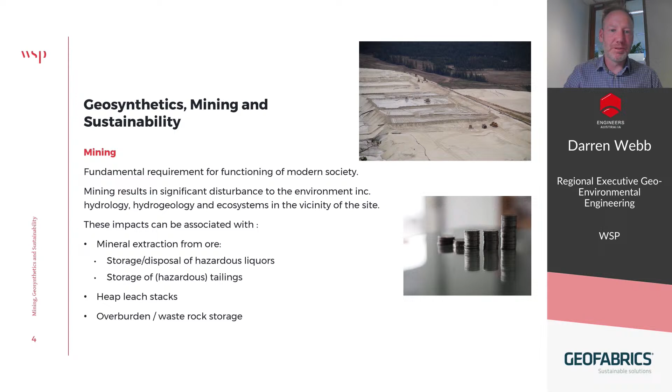So mining and ESG. To maintain a social licence, miners must manage impacts from mining in a manner which meets societal expectations. And that comes from different angles, but particularly ones that you're regularly dealing with the regulator, from financiers and shareholders, and particularly some of the large pension funds are quite active in this regard. And as I'm sure most are aware, there's increasing focus on ESG and sustainability in recent years, and that's particularly in the context of the mining industry, driven in part by some past industry behaviours which perhaps have not quite met society's expectations.

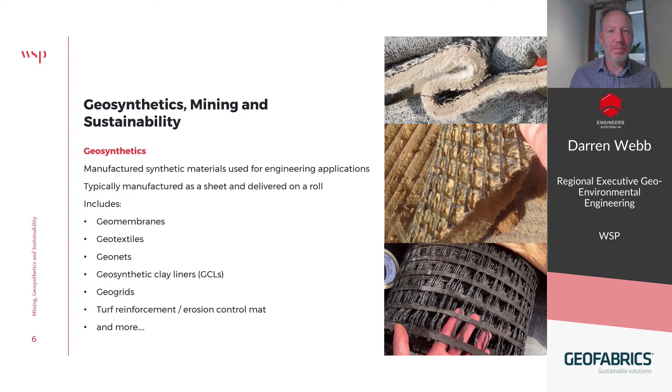And the types of geosynthetics you most commonly will be dealing with are geomembranes, geotextiles, geonets, GCLs or geosynthetic clay liners, geogrids, and then there's erosion control mat, turf reinforcement, and many more. I understand Ryan's going to provide a bit more of an overview of the different products, so I won't expand any further in this presentation. But I guess the message is there are lots of different types of geosynthetic materials, and it's not just geomembranes and geotextiles, which are perhaps the most commonly known or the most commonly used.

So, mitigation of mining impacts in geosynthetics. To mitigate impacts to the environment from mining activities, it typically requires engineering measures to be developed. And geosynthetics can obviously play a role in that.

And this includes applications such as lining systems for solid and liquid - solid often refers to tailings. It's worth noting that lining systems for tailings help reduce seepage, but can increase the liquefaction risk, and that has an impact on embankment design. The embankment needs to be appropriately designed with or without a liner.

It does change things, or it can change that risk profile. Capping systems, so at the closure stage particularly, closing of tailings facilities, waste dumps, etc. Drainage and filters, ground improvement, stormwater management, and of course many more.

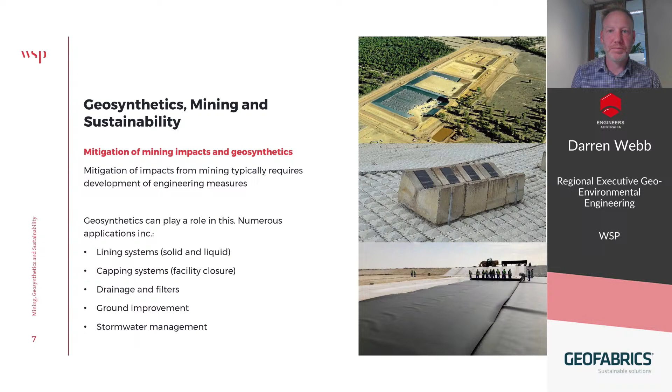So geosynthetics and sustainability. The use of geosynthetics enables construction of liner systems with much lower permeability than naturally occurring materials, which typically means clay, and probably more importantly, in areas where clay is not available. So it helps enable these type of activities to occur relatively sustainably in areas where that may not have been able to be done otherwise.

Due to their thin and engineered nature, they can offer benefits over conventional construction materials, which are typically quarried clay, stone, sand, etc. Those benefits are that it's easier to transport, you ultimately need less material because of the engineered nature of geosynthetics, and associated with that, reduced resource usage and reduced disturbance to the environment - less need to open up borrow areas, import material from quarries, etc. And as a result of all of that, reduced greenhouse gas emissions.

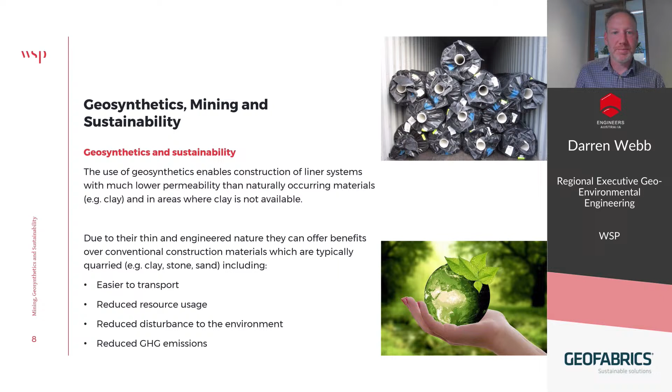So designing with geosynthetics. Similar to any other engineering material, the design must be undertaken with appropriate rigour. In the case of geosynthetics, that means particular focus on durability - chemical, which is typically linked to the exposure conditions, what are the geosynthetics required to contain, and UV and temperature. Obviously, higher temperature applications are more challenging.

And forces during construction and service. This is obviously an easily damaged thin material, and it's got low interface strengths - so in simple terms, it can be a slippery material. You need to design often for veneer or slope stability failure along that interface.

And then specifying the material properly - all geomembranes aren't the same, all geotextiles aren't the same. Different materials, different products have different properties, and that needs to be considered for the design. What does your design actually need?

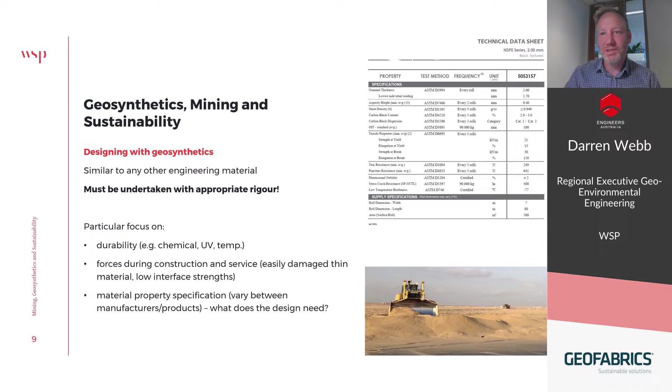Mining applications often involve challenging service conditions, often more challenging than other applications. And that includes storage or containment of very low or very high pH materials, such as those associated with heap leach activities or bauxite residue, where you're dealing with acidic and caustic materials respectively. Any other material that might have a high contaminant load - hydrocarbons, salts, metals, other chemicals - and PFAS is obviously a consideration, along with exposure to high temperature or UV.

And the reality is, usually in these type of challenging applications, you're dealing with a mix of those service conditions - high temperature, high UV, and acidic material containing other contaminants as well. So you're generally dealing with multiple challenges. As a result of that, exposure conditions are almost always site-specific and must be considered as such in design. Just because something worked on another site in a similar situation, it doesn't mean that same product will work on your site, where the ore might be different, the processing approach might be slightly different, etc.

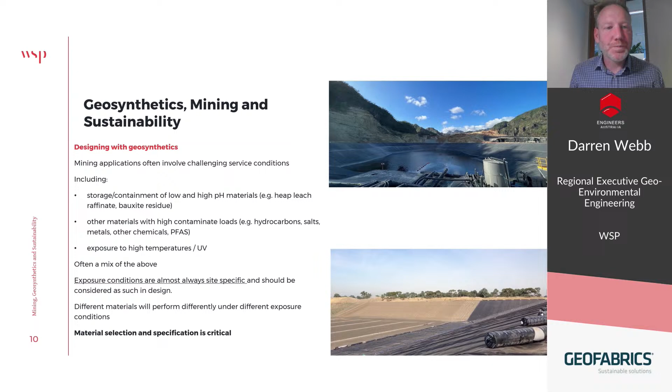So how do you help manage that? Well, there's industry guidance for geosynthetic specification, and the Geosynthetic Institute publications are the most commonly used, but they are not developed to suit challenging applications typically of what you're expecting in the mining industry, or for many other industries that you might be dealing with in geosynthetic design.

There's an excerpt from GRI GM13 there, which is the HDPE GSI specification, and you read that first sentence: 'This standard specification is intended to ensure good quality and performance of HDPE geomembranes in general applications.' What's a general application? It's open for debate, but most of the time when you're working in the mining industry, containing a hazardous material would not be categorised as a general application. So you need to be very careful about using that specification.

Relying solely on advice from a supplier is risky and generally not recommended. Suppliers should and often do know their product very well, so it's worthwhile liaising with a supplier during the design stage. But each application is different, and the supplier doesn't know the design intent. The supplier's role is ultimately to sell a product, and the designer must be aware of that. I know we're presenting with Geofabrics in this presentation, and they have a lot of very good information that can help with design, but ultimately the designer must ensure appropriate material is specified to suit the application and design life. The supplier is not taking on the risk of that material not performing as intended.

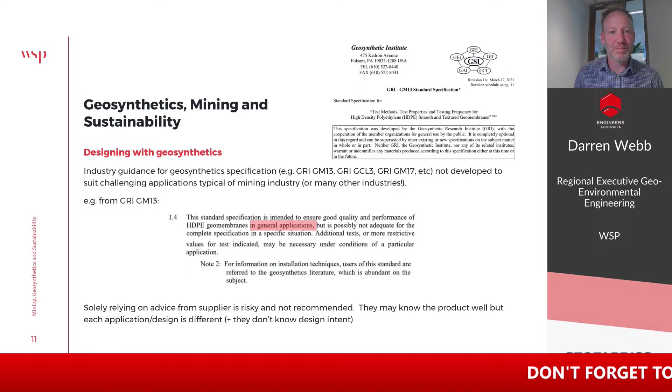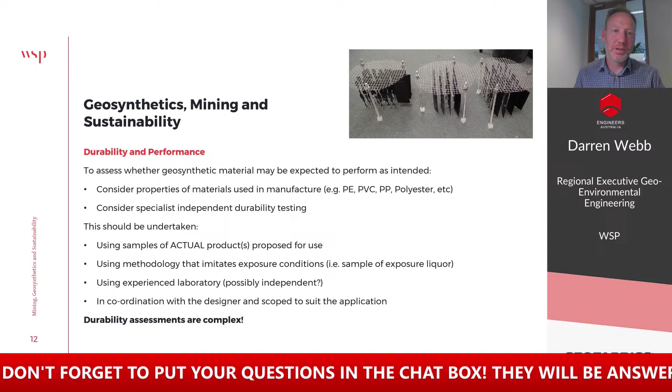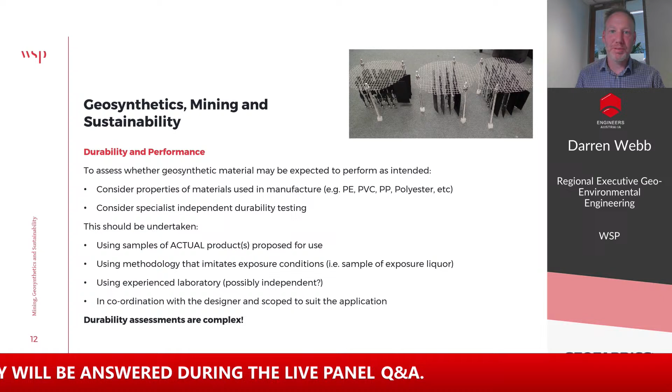So how do you do that? To assess whether a geosynthetic material may be expected to perform as intended, you can look at the properties of the material used in manufacture, so PE, PVC, polypropylene, polyester, etc. You look at, based on research and other publications, how it might be expected to perform in the exposure conditions based on what you know about them.

But most often, for these types of applications, you really need to consider doing independent durability testing. This type of testing should be undertaken using samples of the actual products proposed for use - so the actual geosynthetic product, the actual geomembrane product type that's proposed, not just a generic HDPE geomembrane, but the product that is intended for use.

Typically you might subject 3 or 4 or 5 products to the testing, so you can help identify the best product and also maintain a competitive market for the tender process.

The testing should be done using methodology that imitates the exposure condition, so using a sample of the actual exposure liquor that the material is going to be subjected to, and using an experienced laboratory that is possibly independent. If you're running a test on a suite of products from different suppliers, it's perhaps not appropriate to use the Geofabrics laboratory, because there's potentially a conflict of interest there. I'm not suggesting Geofabrics would do anything like that, but in those situations it's obviously best to use an independent laboratory to avoid that perception.

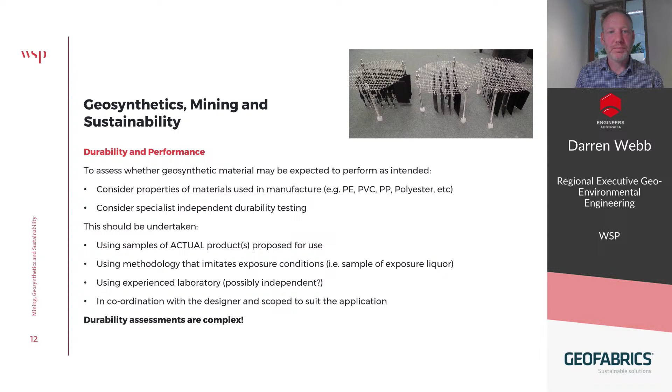So once you've gone through that process to identify the product you want to use, you need to specify it in your design, and that would include QA and QC measures in that specification. Typically there are 3 components to that QA/QC regime, including manufacturer's quality control, or MQC testing.

That's testing done by the manufacturer prior to shipping, routinely done as part of the geosynthetics industry. Every manufacturer does it, and it will be available to the designer to check.

And then independent quality control testing - this is the second step, done by the owner or designer prior to installation. That involves sampling of the material either prior to shipping or after delivery to site, prior to installation. This helps confirm the material is what the owner is paying for, and that the properties are what the design needs.

You might ask, why do you need to do that when you've got the MQC test results? You might be targeting different properties than what is covered by the MQC testing. And experience has shown that sometimes the MQC test results can have limited reliability. There have been situations where things have been picked up in the IQC stage that differ from what the MQC test results indicated, which reinforces the benefits of doing that stage of testing.

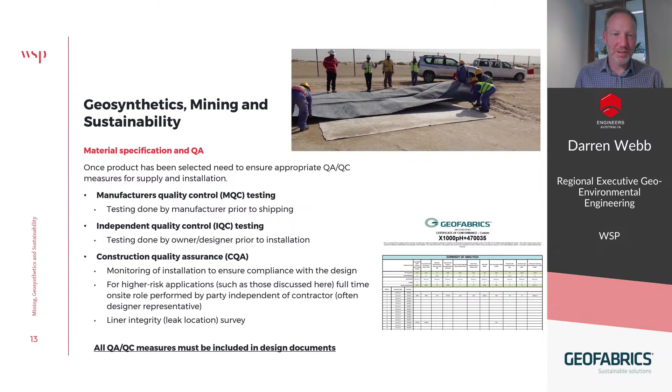But ultimately, all of those QA/QC measures must be included in the design document, prepared by the designer.

So just now, moving on to some applications from some of our recent work.

This first one involves storage of an acidic mine process liquor, approximately pH 1, so very nasty. The design was prepared by another party and included a dual HDPE geomembrane liner system, but it was a little limited as far as the specification and QA/QC measures included.

It was constructed and filled, and after the first fill it was assessed to be leaking unacceptably. The owner dewatered it, undertook a repair regime, and filled it again. Very quickly it was leaking unacceptably again, and was dewatered once more, all within one to two years of completion of construction. You can imagine there was a rather frustrated owner.

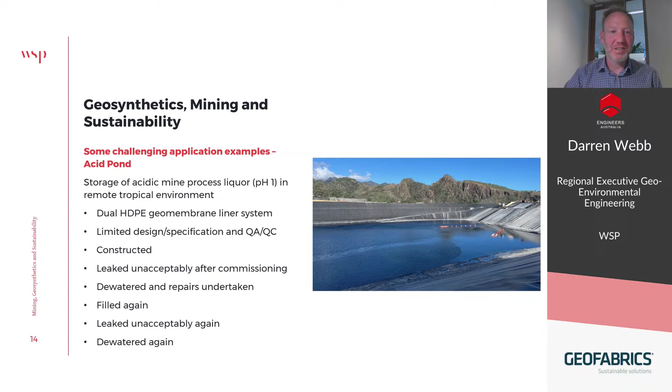So they called in WSP to have a look at the geomembrane after the pond had been dewatered for the second time. What we observed was numerous weld failures, primarily associated with extrusion welding, which we inferred to be associated with poor quality weld rod and perhaps poor workmanship from the welding—and that may be linked to limited requirements related to those two components in the design documents.

What did the design require with relation to weld rod and welding installation requirements? A series of repairs was then undertaken under the presence of a WSP engineer, in a sort of pseudo-CQA engineer role as described earlier. The pond was then filled.

No leaks have been reported, which is good news—it means a reasonable job's been done on the repairs. But what we don't really know is how long this liner system is going to last. What's its durability look like? These are fairly challenging exposure conditions, pH 1.

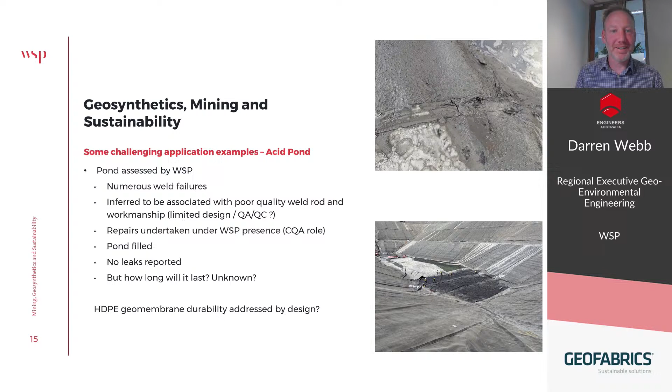Another example: this is for bauxite residue storage. Bauxite residue, most of the time, is a result of the Bayer alumina refinery process, resulting in a very caustic, high pH residue which requires storing.

This facility was in a remote desert environment with lots of sand, no clay—which is what you might expect in that environment—and no nearby water source. But there was a requirement for a composite liner to be incorporated in the design to protect the environment, which is common for these types of applications.

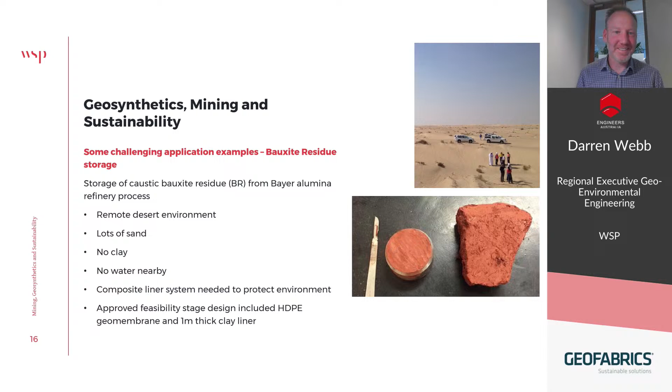There was an approved feasibility stage design that included an HDPE geomembrane and a one metre thick clay liner to form that composite liner. I'm not sure if anyone can see a problem or a challenge there associated with that feasibility stage design.

WSP were engaged at the detailed design stage, and we developed a liner system that incorporated a GCL, geosynthetic clay liner, in lieu of a one metre compacted clay liner. We did engineering analysis and seepage assessment to help demonstrate the efficacy of that design compared with a clay liner.

We went to an independent durability testing regime for the GCL and the geomembrane, in the same type of process we spoke about earlier. That was undertaken on candidate products nominated by suppliers, who nominated them with an understanding of the service conditions, proposing what might be called high performance geomembrane and GCL products.

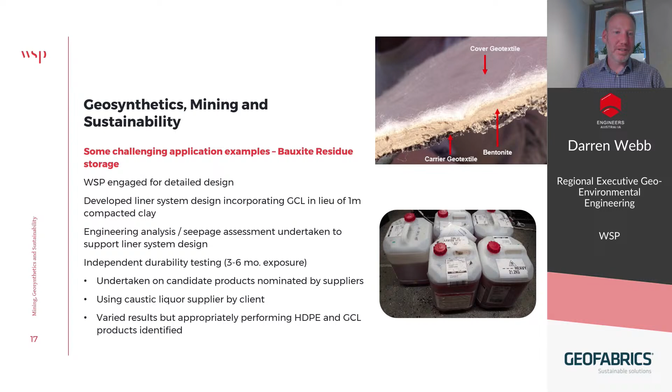So then we got to construction, and we developed a design that included a robust QA/QC regime related to material supply and installation. That included the MQC stage, independent quality control testing done at a third-party laboratory, including sampling from the factory and specialist deformulation or fingerprint testing on the geomembrane to identify if the supplied material had the same stabilizers and additives as the sample provided for durability testing, checking that what got delivered to site had the same properties as the material that went through durability testing. Then the CQA stage, which included full-time on-site supervision and leak location testing, among numerous other requirements.

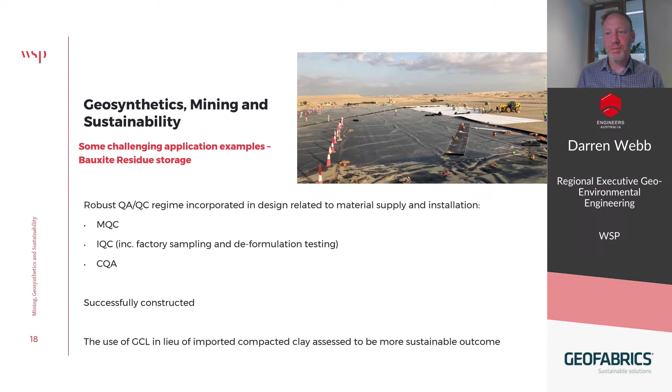It was successfully constructed, and in this situation, the use of the GCL in lieu of the compacted clay was assessed to result in a more sustainable outcome. So just expanding a little bit on that.

There's a white paper prepared by GSI, White Paper 41, which outlines a methodology for assessing sustainability for traditional materials versus geosynthetics. I won't go through the numbers, but based on indicative calculations, very indicative, it looks like there might have been in the order of a 90% or greater greenhouse gas emissions saving resulted from using the GCL than clay, and that's primarily driven by the haul distance for the clay.

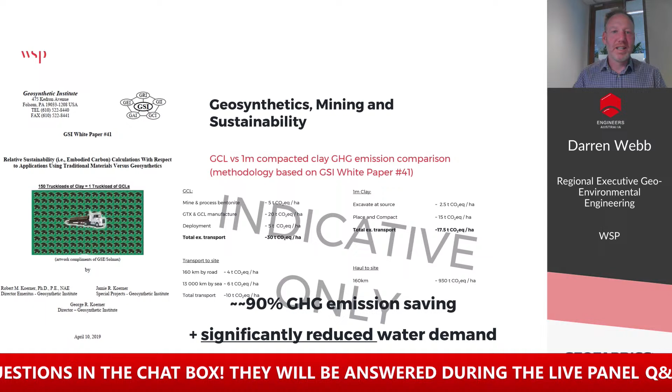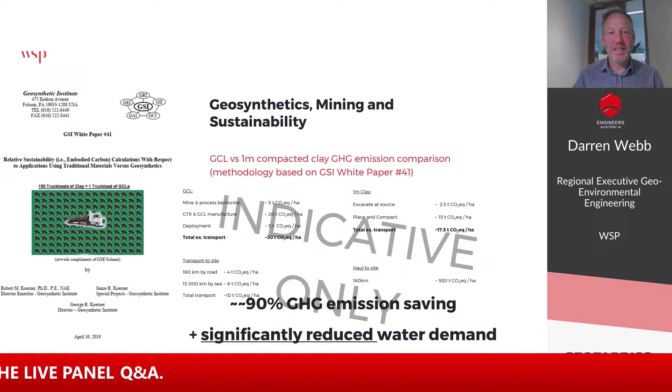That's the main factor there. If you're hauling clay a significant distance, then most of the time, or all the time, the GCL is going to have a lower carbon footprint than the clay, but obviously that's case by case.

The other important factor is that by using the GCL, we're able to significantly reduce the water demand, which in this part of the world was a significant impact or cost. If you're constructing with clay, the clay needs to be moisture conditioned and constructed to at least optimum moisture content to perform as a clay liner, whereas the GCL had reduced moisture requirements. So a really positive outcome in that regard.

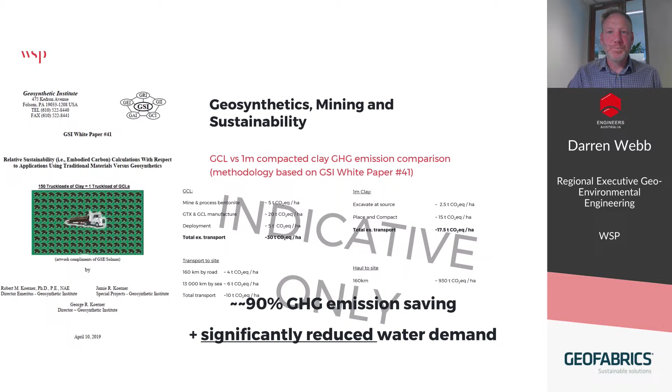To finish up with the summary, geosynthetics can be part of engineering solutions to manage and mitigate impacts of the environment from mining. They may offer increased performance than conventional materials, obviously application specific, and similarly may offer reduced greenhouse gas emission alternatives than conventional materials. I'm conscious this presentation focused a lot on GCL and geomembranes, but you could go through similar assessments for geonets and geotextiles for those types of applications compared with conventional materials, gravel, sand, etc.

Geosynthetics require rigour in design, particularly for high-risk applications, such as those routinely dealt with in the mining industry. There needs to be strong focus, and an experienced designer needs to be involved. And they often result in improved sustainability outcomes for projects.

So that was all I had. Thank you very much. Ryan will present next.

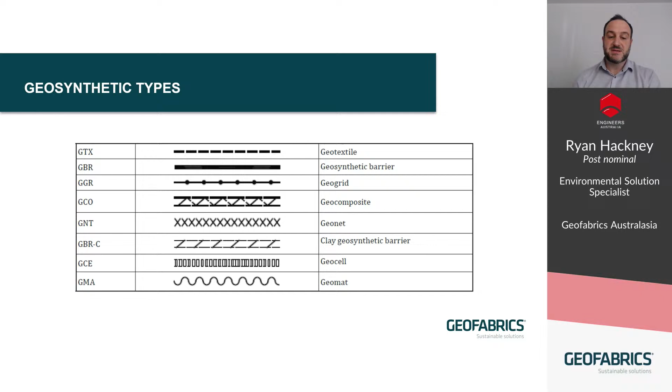In terms of the functions that geosynthetics can provide, those geosynthetic types—geogrids, geotextiles, geomembranes—can perform one or more than one function when utilized on a project. Those geosynthetic functions include a barrier function, drainage, filtration, protection, reinforcement, stabilization, separation, or erosion control. One of these geosynthetic types may encompass more than one function.

Within the geotextile type, there can be a variety of different geotextiles, which can differ by manufactured methodology or polymer type, and different gradings, which could include a range of mass per unit areas. The subgroups of those geotextile types can result in different geosynthetic functions being performed.

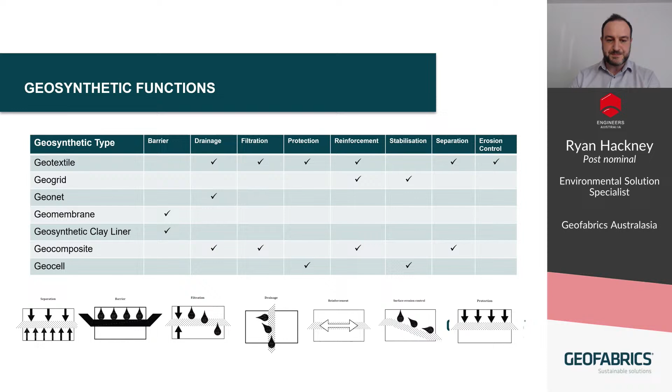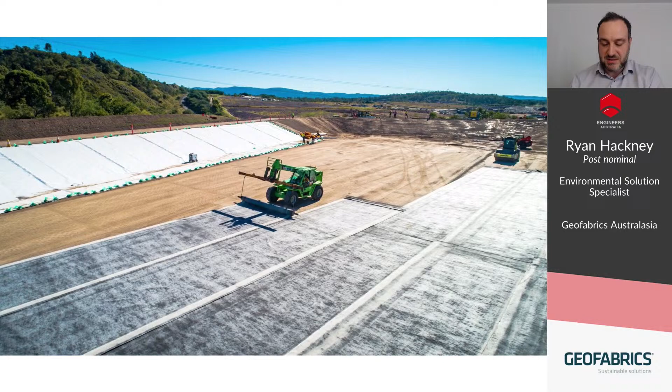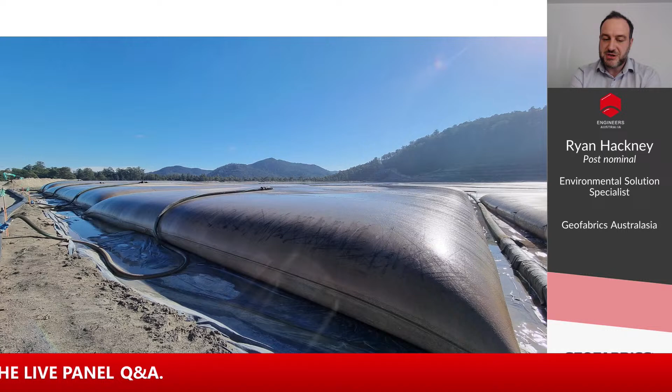Here's an example of a geotube. A geotube is a material constructed of woven fabric—essentially a large pillowcase that's tens of meters in circumference and length. These tubes are pumped with a slurry, and the intention is that the solids are retained within the tube while the liquid or water escapes out of the pores within that woven geotextile, leaving the solids within the tubes.

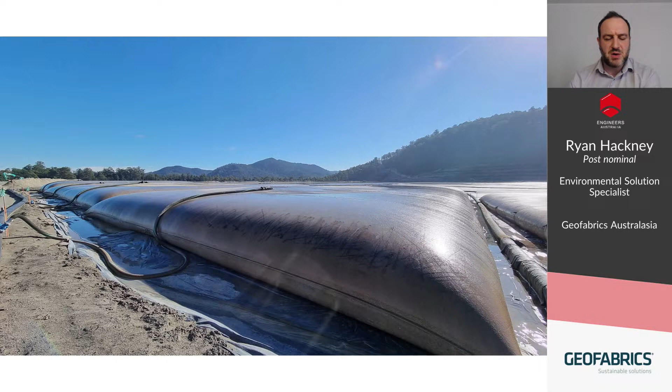We'll see more discussion examples of that later in this presentation. Here's another example of a containment cell, highlighting that geosynthetics are not used in isolation—they're used synergistically with one another, including clay liners, geomembranes, and drainage materials used together as a system to perform their intended function.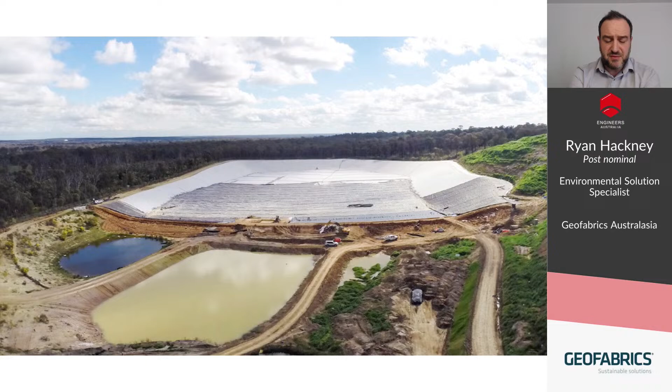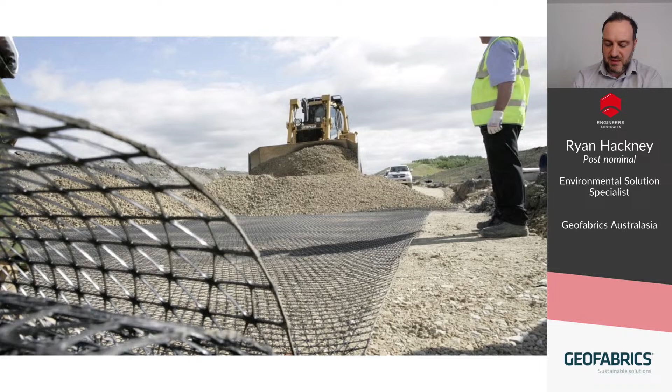I'd like to touch on the United Nations Sustainable Development Goals. These are global goals, adopted by the United Nations in 2015 as a universal call to action to end poverty, protect the planet, and ensure that by 2030 all people enjoy peace and prosperity. The 17 Sustainable Development Goals are integrated, so one action in one area will affect outcomes in another, and development must balance social, economic, and environmental sustainability.

I'm going to start with environmental protection. In the application of mining, there are various different stages of the mine, and within those stages, we have various constructions that occur to either contain, divert, or store mining materials.

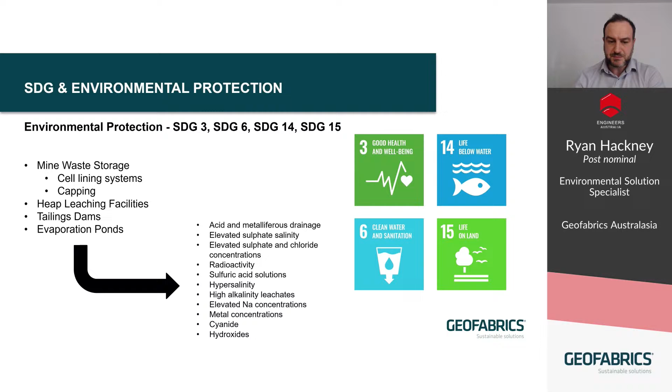So in terms of being able to protect the environment from these various chemistries that are a result of the mining process, there are geosynthetic materials that are utilized to protect the environment. I'm going to give a few examples of two of these barriers that can be used either in isolation or as a system in protecting the environment.

One example is a GCL, a geosynthetic clay liner. A geosynthetic clay liner is a manufactured liquid or gas barrier, comprised of a bentonite clay core, sandwiched between two synthetic geotextiles. Those geotextiles are needle punched and typically thermally locked together. That needle punching process provides internal reinforcement to the GCL so that the material is stable on slopes, because bentonite alone has a very low shear strength.

Bentonite clay is manufactured in a dry state, but it swells to many times its dry volume once it uptakes moisture from the surrounding environment. In its hydrated state, when confined, it has an extremely low level of permeability to water, but also to other chemistry, as you'll see in the next slide.

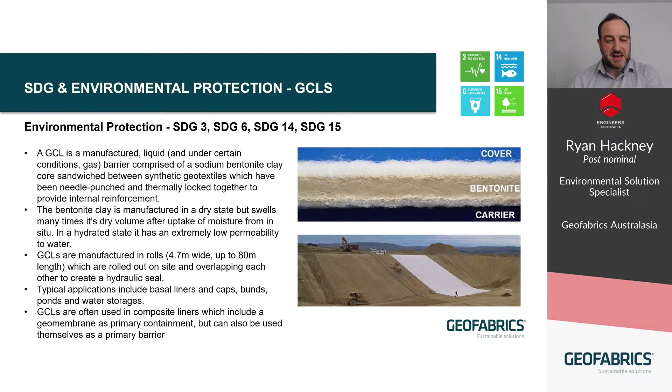So, how do we measure the effectiveness or performance of a geosynthetic clay liner? We test that in our research and development laboratory. What we do is perform a triaxial permeability test, and we actually hydrate and permeate the geosynthetic clay liner with the chemistry of concern.

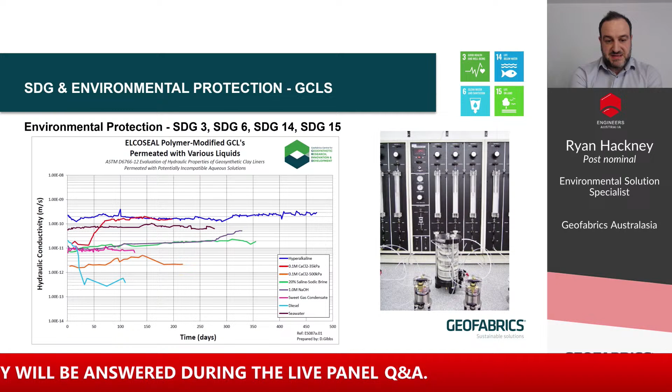Here you've got an example of different levels of hydraulic conductivity that are achieved over time with these different potential mining chemistries. You can see examples of hyperalkaline fluids, various salts, sodium hydroxides, and even hydrocarbons and seawater. You can see from that hydraulic conductivity chart, there are a range of hydraulic conductivities that can be achieved over a few orders of magnitude, but essentially, even at the most aggressive chemistry, we can still achieve less than 1 × 10⁻⁹ meters per second hydraulic conductivity when permeated with a hyperalkaline liquid, for example.

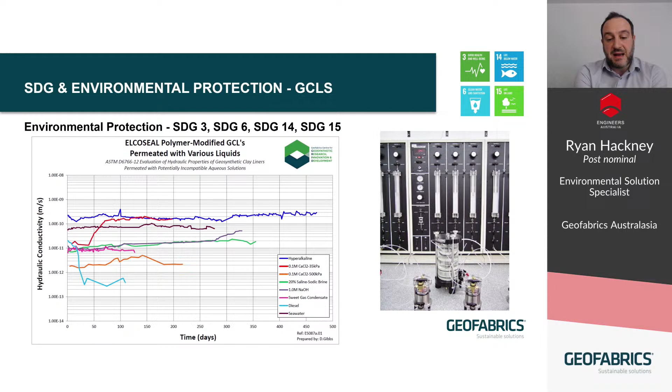Again, we can modify a geosynthetic clay liner by incorporating other additives. This can include polymers, ion exchange resins, or powders such as activated carbon. One example is the incorporation of activated carbon and polymers into the geosynthetic clay liner, which gives the GCL an additional function. So as well as functioning as a low permeability barrier, the addition of activated carbon, for example, can adsorb contaminants such as per and polyfluoroalkyl substances, but also entrap free cyanides, as activated carbon is known to adsorb free cyanide.

So again, by incorporating other additives into a geosynthetic clay liner with the bentonite, we can achieve additional functions through that process.

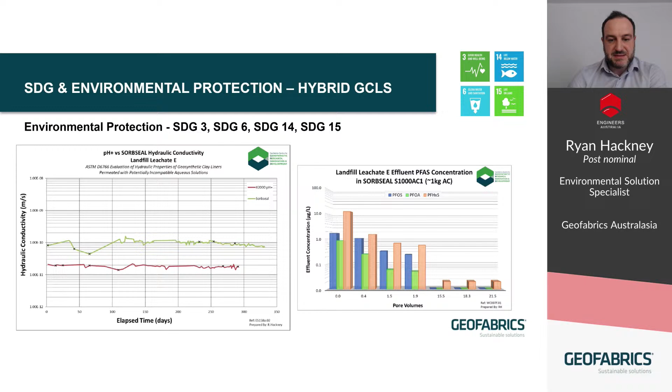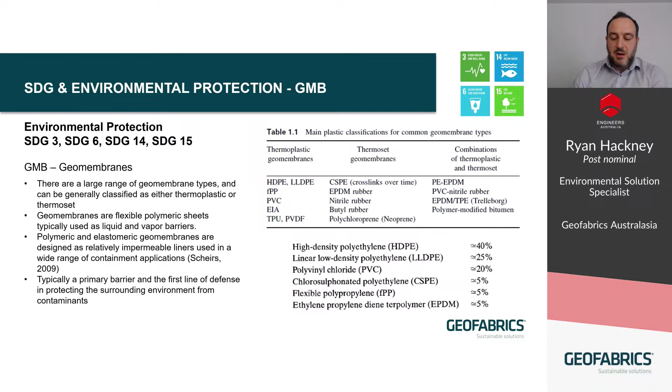So I'll focus a bit on polyethylene geomembranes. They're the most widely used polymer in the group of geomembranes. HDPE, high density polyethylene, and LLDPE, linear low density polyethylene, are the two main subgroups of that polyethylene family. The difference between high density and low density is defined by density, with a cutoff point of 0.940 grams per cubic centimeter. Anything less than 0.94 is classified as low density polyethylene, and anything higher is classified as high density polyethylene.

The polyethylene geomembrane itself is actually a formulation. It includes a polyethylene base resin, and then there are additives that are added to that to create a geomembrane.

The additives include carbon black. When you see a black geomembrane, that's a result of adding 2 to 3% carbon black in the formulation. Or in the case of white geomembranes, it's the titanium dioxide pigment that colors it white. In addition, we have stabilizers and antioxidants, which protect that base resin from degradation. On the next slide, we'll look at how we challenge membranes to ensure service life in different mining chemistries.

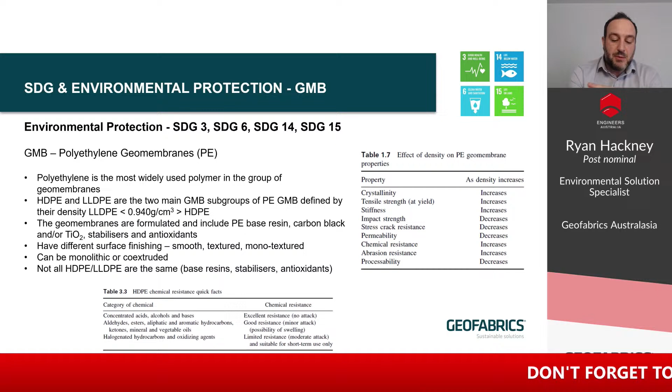In terms of density, there are effects on the polyethylene properties. For example, as the density increases, the crystallinity increases, which means we get an increase in tensile strength, stiffness, chemical resistance, and abrasion resistance. But with an increase in density and crystallinity, it can also impact stress crack resistance - the more crystalline a material is, the more susceptible it can be to stress cracking, and that can ultimately be how geomembranes fail in situ.

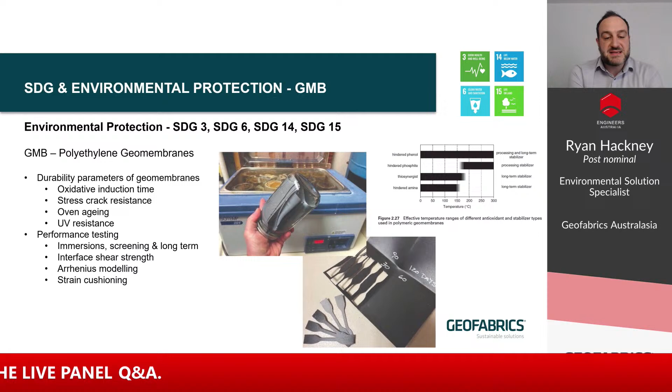In terms of measuring the performance of geomembranes, similar to what I demonstrated with GCLs, we perform what's called an immersion test. We take the chemistry from the site, the leachate or the liquor or the pore water, and immerse the geomembrane in that actual liquid. We do that at elevated temperatures, which accelerates degradation reactions. Typically what's happening is the chemistry is reacting with those stabilizers and antioxidants, which are protecting the base resin from breaking down.

It's really important to understand the effectiveness of those additive packages, and we can measure that by a property such as the oxidative induction time. We can immerse the material in these liquids of concern, and then at various time periods of immersion, take a sample and measure what the oxidative induction time is, which tells us how effective that package is over time.

In addition to measuring the durability in this way, we can also oven age the sample. So again, this is a hot air oven, and it's a challenge of that stabilization package and how well it can protect that base resin. Further performance tests include strain cushioning, which I will speak about in the next slide.

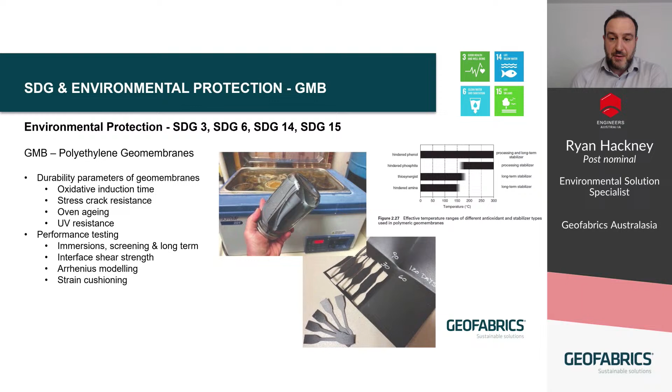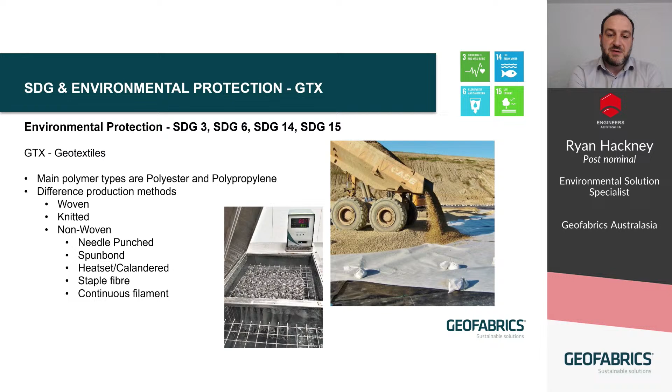Moving on to geotextiles, as I mentioned, geotextiles can perform various functions including separation, protection, drainage, and reinforcement, and it comes down to how those geotextiles are actually constructed. There are different methodologies such as woven, knitted, and non-woven geotextiles. Within that non-woven category, there's another subcategory including needle punch, spun bond, heat set, staple fibers, and continuous filament. The various manufacturing methodologies lead to those different functions that the geotextile can perform.

If we focus on cushioning, in terms of protecting that geomembrane used for containment, we use what's called a cushion geotextile. This is a heavier grade geotextile, typically a heavy grade staple fiber, and it sits within the system, typically next to the geomembrane liner, cushioning the effect of a drainage aggregate or material that can impose stresses onto the underlying geomembrane.

We can measure this in the laboratory by setting up this system, taking a drainage aggregate material and placing it on a geomembrane with the cushion geotextile sitting between the two, as it would on site. Within that system, we have what we call an aluminium recording plate, shown in the picture in the middle. We impose the load that this system is going to be subjected to on site, and after a 24-hour period, we remove that aluminium sheet, which records those indentations of that aggregate under load. We can laser scan the aluminium sheet, which measures deformations every square millimeter, and from that, calculate the maximum strain being imposed on that membrane.

If the strain's too high, we know that we need a heavier cushion geotextile, whereas if the strain is lower than the desired percentage specified, we can either keep that as a factor of safety, or tune the system and maybe try a lighter geotextile.

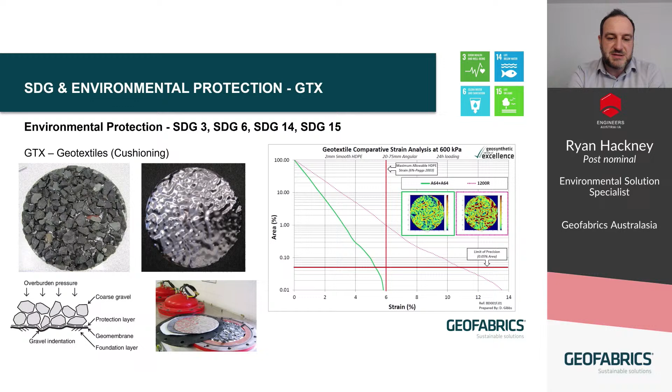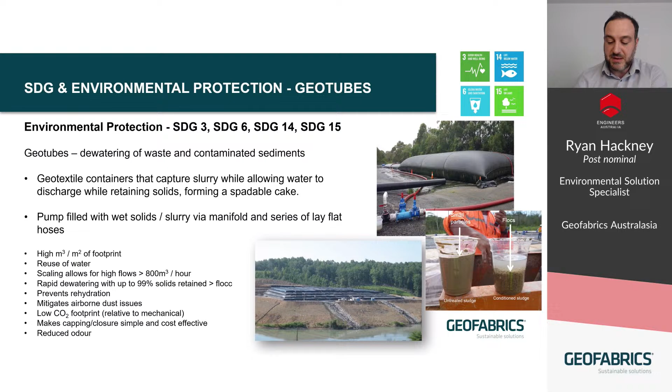In terms of rehabilitation and revegetation, one product range that's available are erosion control products, and these can be synthetic or natural geotextiles typically. We can do analysis on these types of products to show how they perform in terms of their effectiveness of erosion control.

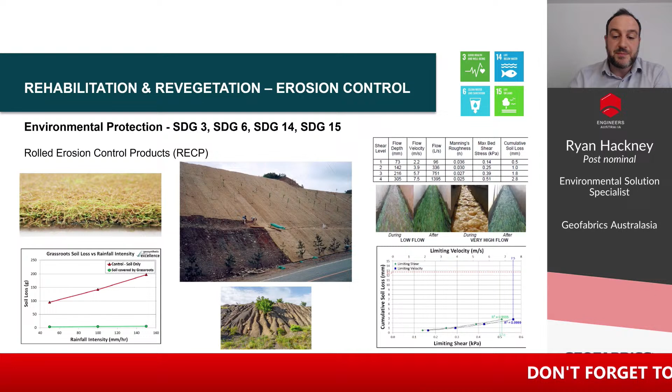There's unvegetated tests where we can look at different rainfall intensities and measure the soil loss underneath the material, to show the effectiveness of the product in an unvegetated state. Or we can show the effectiveness of these erosion control products once they've been vegetated, and show at various levels of velocity what the soil loss looks like underneath the product. Some products perform really well once vegetated, reducing soil loss to a very high degree.

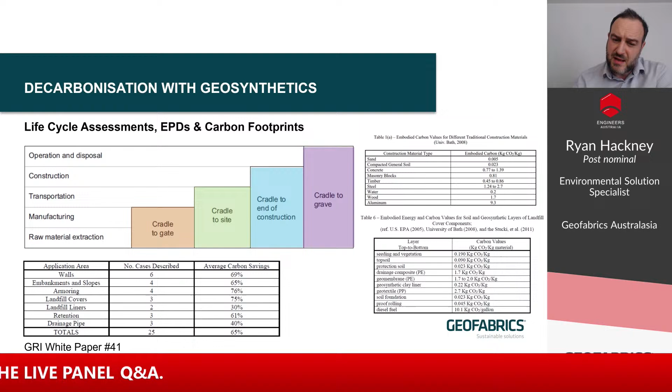A few slides on decarbonisation with geosynthetics and life cycle assessments. Life cycle assessments of a geosynthetic include various boundaries, and this allows us to measure and calculate the embodied carbon within a geosynthetic material. By having that information, you can incorporate it into carbon footprint calculations, because there are published values on traditional materials in terms of their embodied carbon, and there are published values for geosynthetics and their embodied carbon.

These life cycle assessments can include the various stages of a geosynthetic's life cycle - from raw material extraction through to manufacturing into a geosynthetic product, transportation of that product to the project site, the energy required in constructing the project itself with the geosynthetic material, and then the ongoing operation and potentially the disposal at the end of the project. By taking measurements and calculations through these boundaries, this is how we can measure these embodied carbon values of geosynthetic materials.

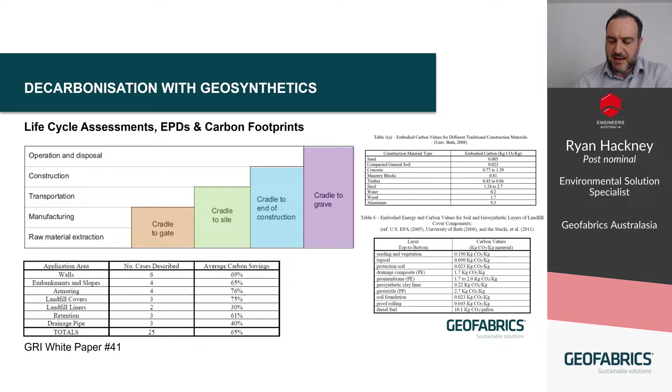There's a GRI white paper 41, and the references for this are at the end, but the white paper shows that incorporating geosynthetics into a design over a traditional construction methodology can, on average, result in 65% carbon savings. There's a lot more information available on this, so please get in touch with me if you would like to share some further information.

A few examples in terms of stabilization. There's a haul road here that's theoretically constructed at 5,000 square meters. By incorporating stabilization grids, we can reduce this non-stabilized layer from 970 millimeters to 455 millimeters, and that has benefits not just in terms of cost or time, but significant carbon savings in the reduction of truck movements required for moving that extra aggregate layer.

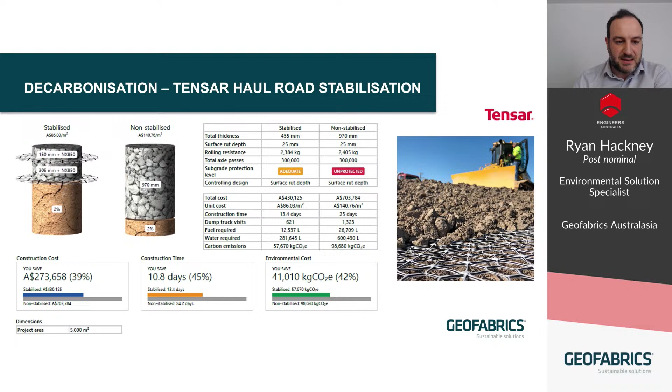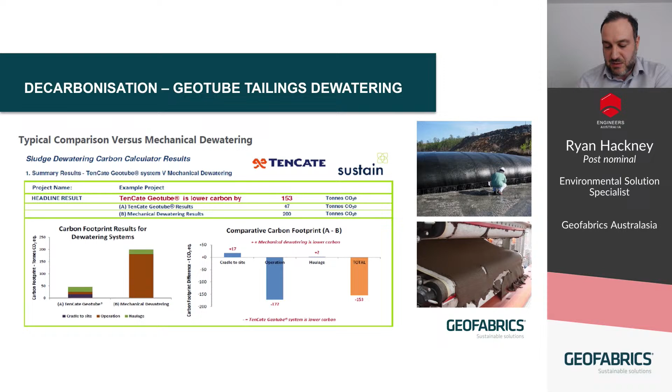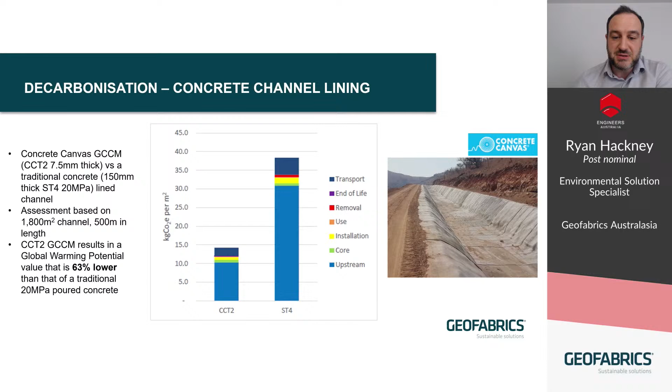Channel lining - if we compare a traditional concrete poured channel versus a geosynthetic concrete canvas matting, by utilizing a geosynthetic concrete mat in place of poured concrete, this example shows there is a 63% lower global warming potential by utilizing this geosynthetic solution to construct a channel.

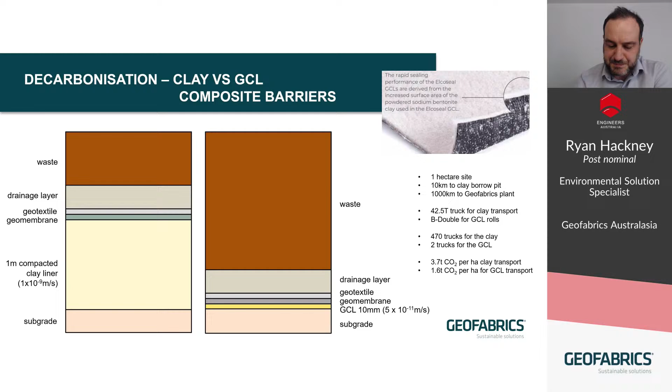Last 2 slides, just to highlight the benefits of choosing local - geosynthetic materials by Geofabrics are manufactured in 2 plants, one in Albury, one in Ormeau. That has environmental benefits alone in terms of carbon footprint and transporting distance from the point of manufacture to site, but also by choosing local manufacturing, Geofabrics employs over 100 production staff across those 2 production sites, contributing over 10 million per year into regional communities, and also supporting over 1,000 active suppliers in regional Australia.

In terms of incorporating recycled material into geosynthetics, Geofabrics manufacture geotextiles and HDPE pipe with recycled content, and that has resulted in the diversion of over 70 million plastic bottles from landfill that are now incorporated into geosynthetic products that can be utilised on construction projects.